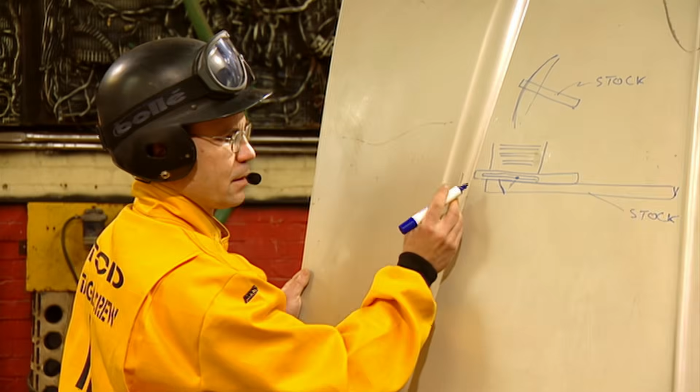Can I just say, I'd be a bit concerned that all this loading mechanism is complex. If that design is 1,500 years old and it still works, and you've had tens of thousands of people working on it for 1.5 millennia, there's something good about it. Nice try, Todd, but it could take another millennia to convince our headstrong young Captain Pup.

Yeah, we need some bits. That's a good plan. Got to be looking at, Steve, something that's got brakes on it, because air capacity is going to be everything to us. We're going to need a basic frame, Dens - seamless tube with about a 14mm bore. Yeah, we need a spring, and get as much as you can, because we don't want the other team getting it before we do. Right, lads, that'll do. Off you go, and good luck. Right, Dodge.

Loaded with their lists, our scavengers shoot straight out into the scrap. It's mayhem on the heap as our 2 teams must find the best bits and bobs to build automatic weapons.

The Big Dippers, Steve and Brian, are sifting through the scrap, looking to pick up a truck to build an awesome air-powered cannon. Dodge, do you copy? It's in a white Ford van. Brian's just having a look at it. I'm just going to have a look over this other side, see if there's anything over there, mate.

Whereas the stage crew are looking east for inspiration and have agreed on a plan to build a mechanised Chinese repeating crossbow. Or maybe not.

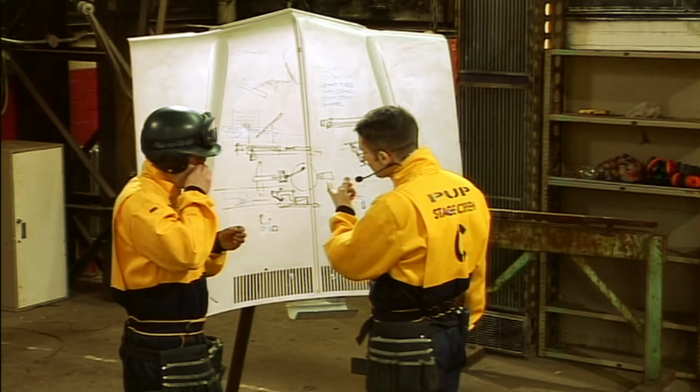Young Captain Pup has decided the existing plans look decidedly dodgy. He's worried about the rate of fire. You're stuck, I'm not convinced it's the best way to do this. It's your team and you've got strong will - if you're not going to be behind it and committed... No, that's not it, what I'm saying. If we make a decision, I will be committed to it. But I'm saying, now we need to make the decision. If you're asking my opinion, I say go this way.

There's a drama going on in the stage crew build area. Todd has one last try to pull Pup round to his way of thinking.

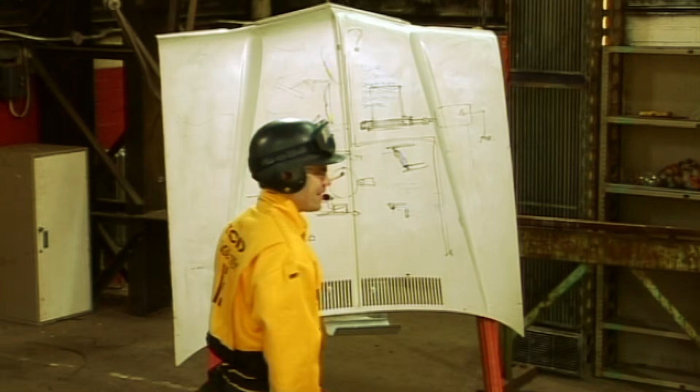Now, have you come across something called a sabot? No. We can get like a length of drain pipe, maybe 14 inches long, pack it full of 5 darts, 10 darts, whatever, and you shoot that.

Stage crew expert Todd has had the ingenious idea of using a sabot to increase their rate of fire. A sabot is a disposable sleeve used to fire funny-shaped objects. It fits around the object and when fired, falls away, allowing the funny-shaped projectile to carry on flying through the air. It's a great way of firing more than one arrow at once, but will the headstrong young pup go for it?

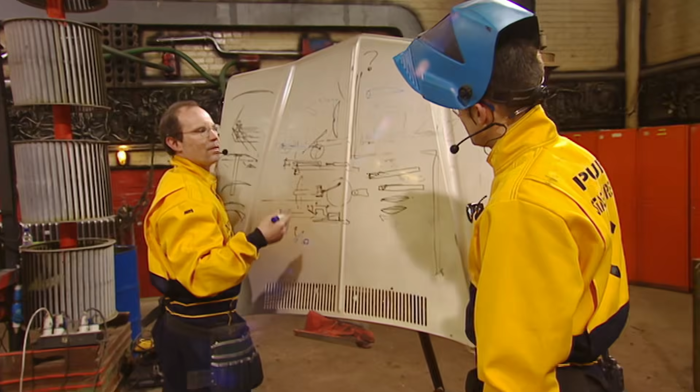Oh, Todd, I like it, mate. I like it. Right, and that would look really cool. I like that.

Stage crew, well, teams don't usually get the gas axe out this early on. Well, it's something we want, so we're going to have it. What are you trying to get at under there? The springs off this lorry. Leaf springs. And what are you going to be using these springs for? It's basically a crossbow principle - a magazine full of arrows that will self-load. Crossbow with a big tight wire. The wire will be pulled tight, arrow will drop in, automatic release. Right, well, I better leave you to it. Excellent, but best of luck and enjoy firing the arrows. See you later. Bye.

Denzel opts for strong-arm tactics on those leaf springs. Oh, that was it, that was nearly it.

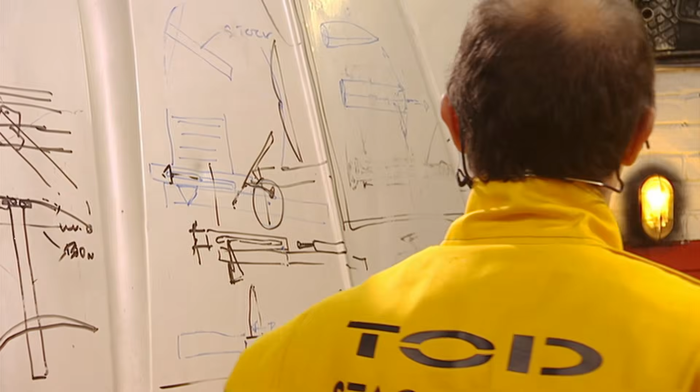So Pup is sold on Todd's genius idea, which means Denzel's scavenging hasn't been a waste of time. Oh my word! Now... or has it?

For a lorry, how many springs like this have you got? Only that one, and then we've got one that's the same length, but it's at least 5 or 6 layers. Okay, because we need the spring to be a matched pair, because we're using 2 springs. All right, I didn't realise it was 2. Ah, right, okay, so we need a matched pair of springs. Yes. Right, okay, that could be a job.

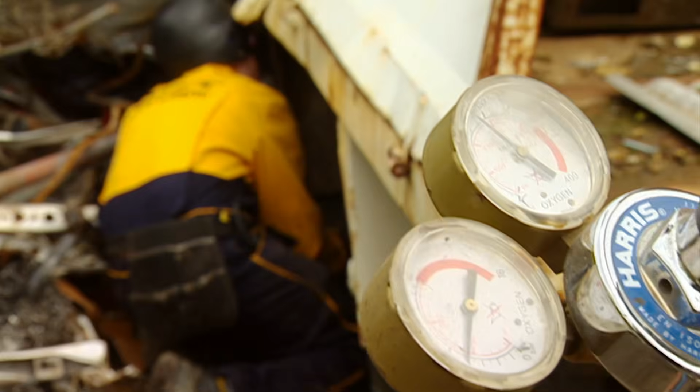Denzel breaks the news to Jet. Oh, so we've got - both sides need to be even matched, so we're looking for one vehicle. So there's really no point getting the other springs out. What a waste of time. But we can't find anything at the moment, got to keep rummaging around cars, I reckon.

It seems there's a lot of them over there. We're lagging behind, I think, aren't we? I don't know. Yes, boys, you are.

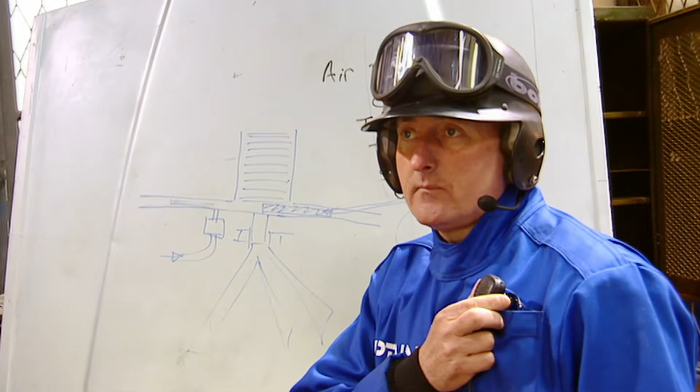Go ahead, Dodge. Dodge, we've found a vehicle. Brian's happy with it, got some air tanks on. The only thing is, it's not starting at the moment.

I'm a bit worried, Brian, we haven't got a home start. But is there something in the truck that you actually want? Yeah, there's a compressor and air tanks and everything you need on here. So could you build the whole thing on the back of this? On the back, that's right. You just run the truck and that pressurises the tank and fires the arrows.

Big trucks are harder to stop than little cars, so they use air brakes, which are very powerful. The air is compressed by the compressor and then stored in a receiver. When the truck brakes, it uses the air to push the brake shoe onto the wheels to bring the truck to a standstill. So if the Dippers can get this truck turning over, they can use its brakes to get the gas for their air-powered cannon. Trouble is, if they can't get the engine started, the air brakes won't work, and they won't get very far.

I mean, it looks in fairly good nick. Yeah, I think it's done a few miles. I think it'll go.

The boys from Blackpool have everything they need to build their air cannon on this broken-down truck, but they'll have to get it back to the build bay.

But the stage crew are really having trouble getting started. Denzel, hang on, mind power. And their communications have now broken down. My team seem to be... their radios are on. In fact, you should give them a talking to next time they come on, because they've got to answer. Hello, so we're never going to get Denzel anywhere. Denzel! Denzel, is someone shouting at us? No, I don't think so.

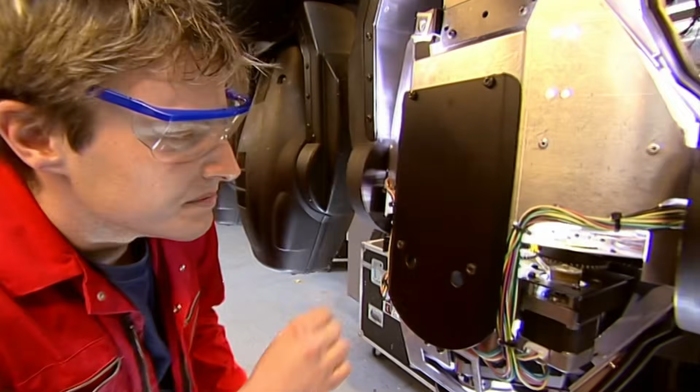Then there's the supporting cast, engine-obsessive Jet. I love jet engines, they're great. Jet engines rock. No one should ever use anything else apart from jet engines for everything.

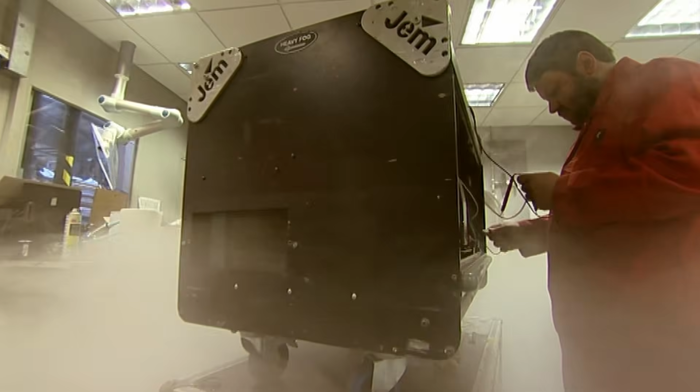And lastly, an extra any cast would want is Denzel, who found his fabricating skills on the farm. He's very much not your bog standard graduate design engineer student, he's seen it from the real life side of things. So what's the stage crew's motto if things aren't going their way? The show must go on!

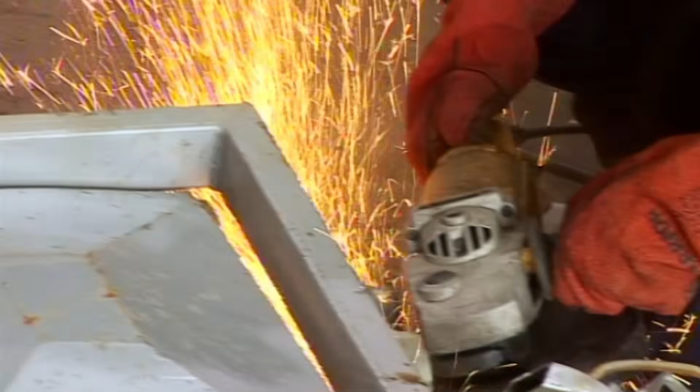Dance, can you find any straight bits? With communication restored, the stage crew are putting in a rousing performance on their repeating crossbow. Pup builds the stand, the lock and stock is sorted. So, engine, gearbox here. Yeah. Cue Denzel with two smoking leaf springs. Okay, good. Now in a perfect world, you would have got the ones without holes in the middle. But in a perfect world, shall I just shut up? Yeah, absolutely.

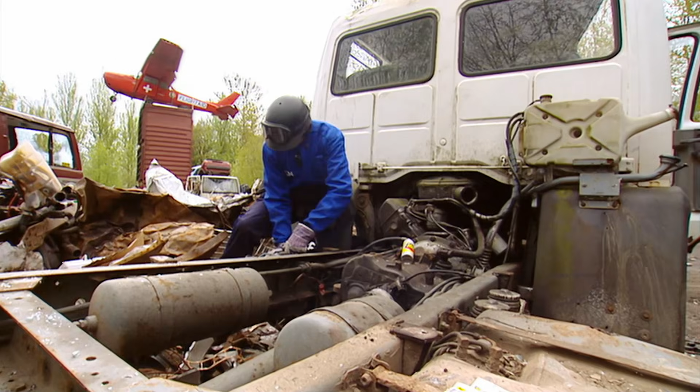The Big Dippers are still working on that broken-down truck. It's got all the gear they need on it to build their air cannon. Expert electrician Steve is having a rough ride trying to get it jump-started. Where's the big truck, Stephen? We're going to try and get it started now, Dodge, and we're bringing it in. They need the pressurised air system from the brakes. It's not going to go.

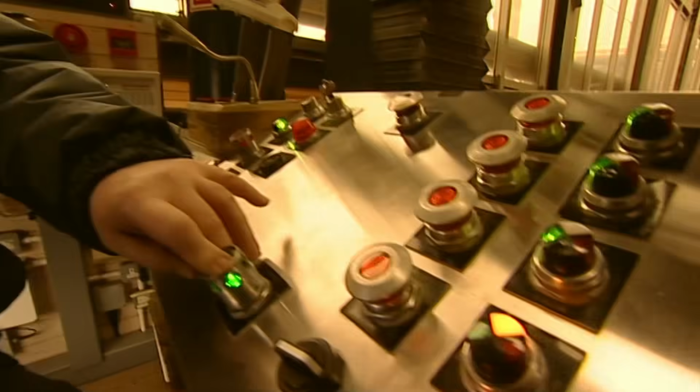He might be feeling the pressure, but his team know all about thrills and spills. The Big Dippers, a team of roller coaster repairmen from Blackpool. Off they go! When Captain Dodge isn't enjoying the wind in his hair on the big one, he's managing these theme park techies.

It hasn't always been an easy ride. Dodge has had to earn the respect of his team.

Yeah, should be no problem with Dodge for the first 10 minutes. We'll just end up building it for him, really, and we're just taking the credit, I think. No, it'll be a team effort, Brian.

Team effort. While scavenger Steve does see the amusement in fairgrounds, he's not happy with heights. Steve's not safe, really, off anything over 4 foot, is he? 2 pair of socks and that's it for Steve.

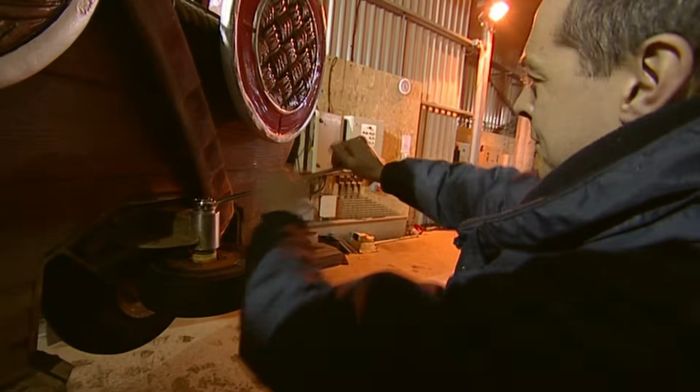And they have a secret weapon under their kiss-me-quick hats with loudmouth Brian. One of the secret weapons on our team is Brian. This man can build anything. We'll rely on you, Brian, because you can make something out of nothing. You are that good.

Anyway, we are the Big Dippers, and we're going to win. Well, they won't be unless they can get their truck started.

Brian, do you want to drive it? He may not be confident on the roller coasters, but Steve certainly knows his way round an engine. Nice and straight. Right, take her in. Go, Brian.

Very positive, or utterly presumptuous? Time will tell.

This week's judge is Master of Archery Steve Ralphs. From Orlando Bloom as Legolas to Keira Knightley as Guinevere, he's the man who teaches the stars how to shoot. Nice to see you. Yeah, welcome to the heap.

Thank you very much. Now, it seems they've finally decided on their design, as far as I can see. We've got the Big Dippers with their compressed air cannon type design, and the stage crew with their traditional crossbow. It works along the lines of the Chinese repeating crossbow, which is a manually operated machine. The stage crew are going to use a mechanical means to replicate that design, and of course the Big Dippers are making basically what's a gun. It is essentially a gun, isn't it? Yeah, conceptually, which one is more likely to actually fire something?

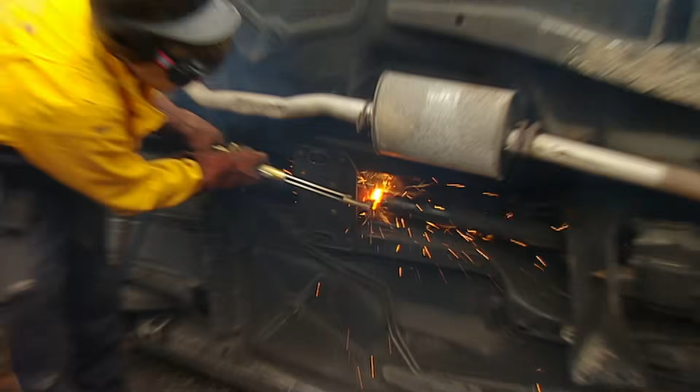Yes, we need to get rid of this exhaust, don't we? Jet is firing up his engines as he gets gas axing. Pup's putting on the leaf springs for the bow. Things are really hotting up for the backstage boffins.

Maybe a little too hot. Jet's gas axing has set fire to the car's upholstery. Sorry.

Just took a face full of whatever. I reckon we're out, mate.

With a flagrant disregard for his own safety, Denzel continues to try and get off that reduction gearbox. Can you get any more lift on it for me?

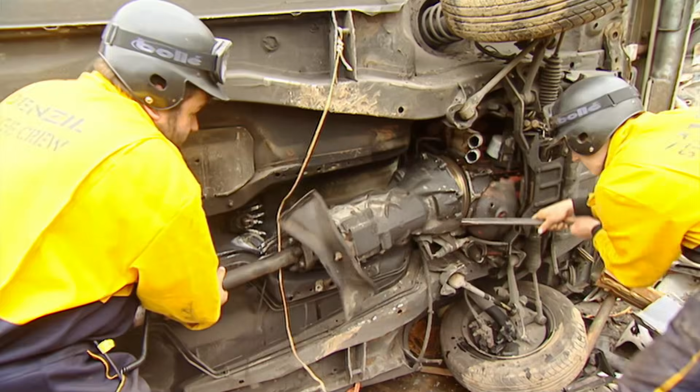Lift - it's essential, as it'll be the speed regulator for their repeating crossbow firing mechanism. That'll do. Do you want to put it straight in the trailer with me? Yeah. While Jet and Denzil are collapsing a car,

Captain Dodge decides to take down that truck. 1, 2. Not happy with just destroying the front end, Dodgy cuts that lorry down to size.

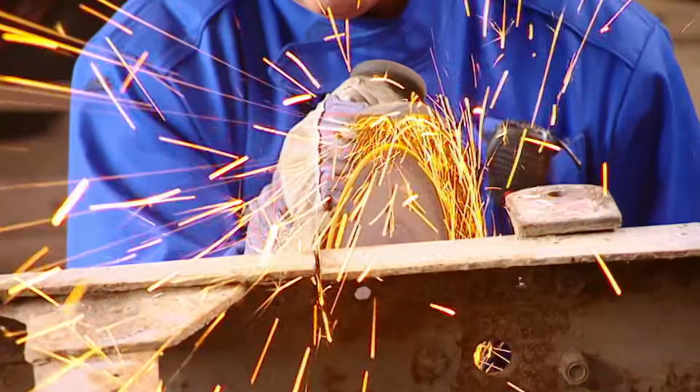This is the main find, though. This is good, and it works. Hey, perfect. Did a bit of fabrication - cut the roof off. Made it into a cabriolet.

But I know it's effectively an air cannon, isn't it? That's right, yeah, we're using the air system off the actual truck, going through the receivers. Do you know how many blasts you'll get from it? No, we're going to try later on, a bit of trial and error.

Well, I mean, I think by the looks of things, you've still got a fair amount to do, haven't you, Steve? Yeah, looks like Dodgy's going to have a word in a minute, so I best get back into action. All right.

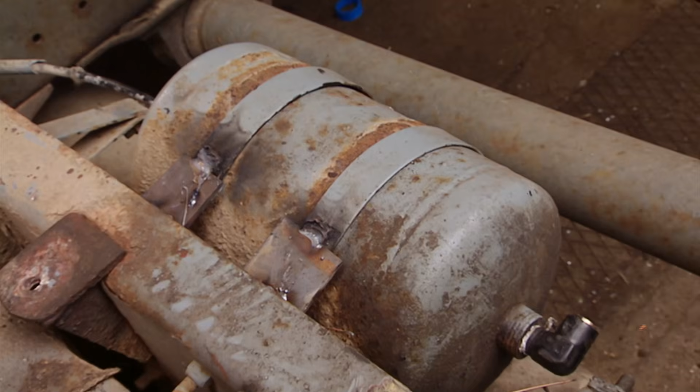Captain Dodge drags in the floor plate and dishes out the orders to his roller coaster repairers. This plate is ready to go on here. Stitch, stitch, stitch, from here to there, from here to there, one at the back. I'm going to mount that tank on here, however. But expert John thinks there may be a problem.

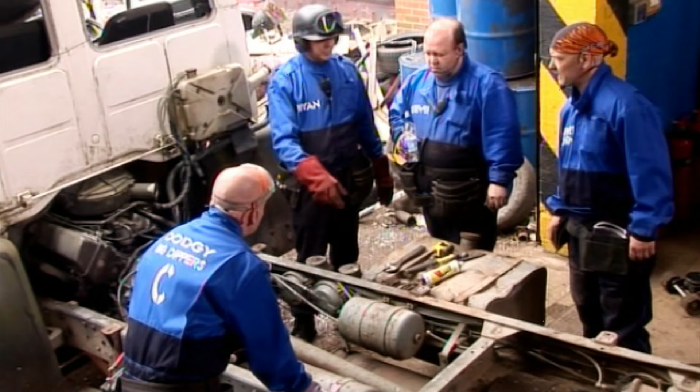I think we won't have enough air in these. He thinks the truck's brakes might not hold enough air. I think what we should do at this point is find more receivers. Yeah, because you've only pressed the brakes a few times and they're gone. I know, yeah, we do. So it's back out onto the heap for Steve and Brian, looking for some air tanks.

Meanwhile, Todd and Pup are tanking through their build. They finally seem to be seeing eye to eye. It's starting to take some sort of shape now, which is always a bit of a boost to morale.

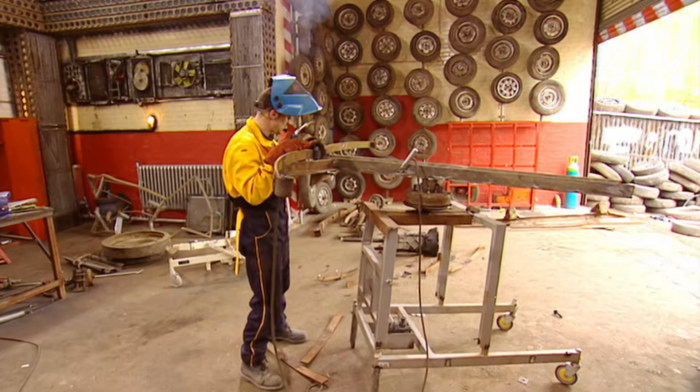This looks absolutely fantastic, Steve. This is the Chinese repeating crossbow, and what the stage crew are building is the descendant of this. This is its ancestor, the manual version, whereas their machine works automatically. It addresses the age-old problem a crossbow has with its rate of fire. You load into this, the string is captive, there's a small peg, and it has a mechanical repeating motion.

So does that mean I can actually have a go and shoot some darts? So you're going to pull rank on me? Well, I think yes, simply I am. Fine, so tell me what to do then. You don't put it up by your shoulder, you have it held down here, and you cycle, move this hand back, and by cycling this forwards, engage. So you just pull it back? Yes, as fast as you can cycle the action.

That is fantastic, wow, I'm getting sparks. So you see, what the stage crew are doing is they're using this device, but they're going to make it work automatically, using the machine rather than an operator.

There's a lot less than 10 hours left as Super Scavenger Denzil picks out bolts to keep that bowstring tight. Dropped one, mustn't do that. They're like gold dust, been rummaging all day for these. Here boys, if you didn't have a beard I'd snog you. Oh no, thank God I got a beard.

Actually, I think that's going to get us out of a mess. Yeah, that's nice.

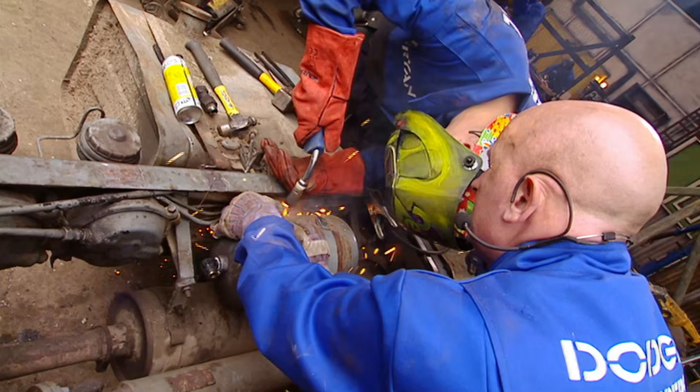Right, what? Just gone through an air pipe. Brian may well look sheepish, he's just tried to weld a rubber pipe. Yeah, well, if you did, you could hear the air coming out. It was just doing it.

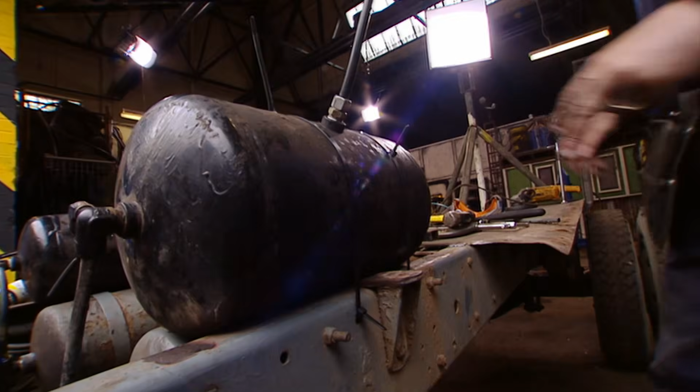Teams, your attention please. You are halfway through the build. You have 5 hours remaining. 5 hours remaining, teams, thank you.

Better pull your finger out, you dodge. John, we need to be doing a bit. If their air cannon isn't airtight, they may as well take a train back to Blackpool. This really is a roller coaster of a day for the fairground fixers.

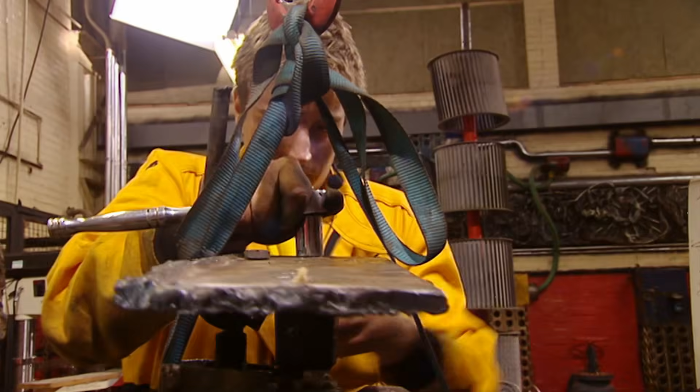Will the stage crew get their crossbow repeating? It was your idea, no, it's your idea to do centre one. And will the Big Dippers get back on track? That makes sense, yeah.

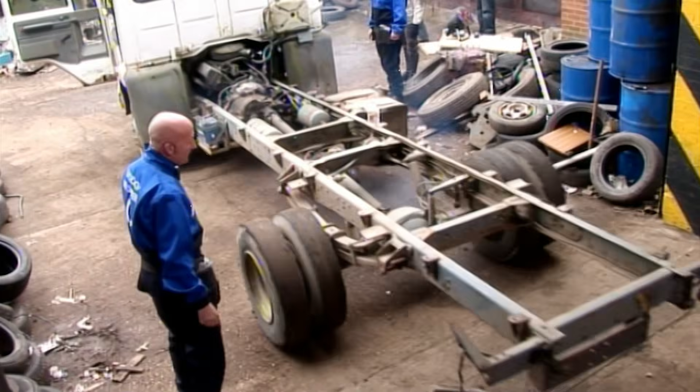Welcome back to Scrapheap Challenge, where our two teams are building automatic archery machines. The stage crew, a team of theatre technicians, are looking hot under the collar forging their repeating crossbow. I think that's going to get us out of a mess. Yeah. The Big Dippers, roller coaster repairmen from Blackpool, have nearly all the bits they need to build an awesome air cannon.

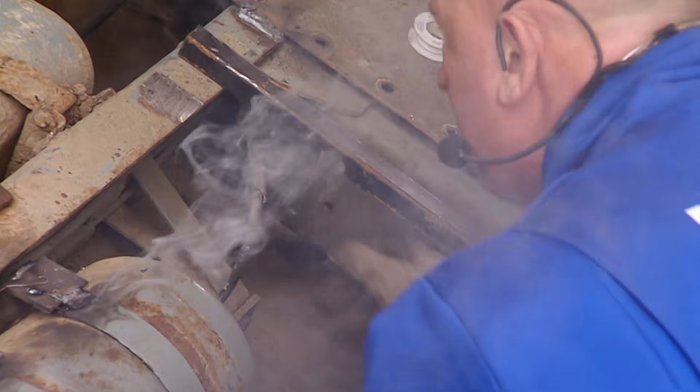But they've cut through an essential air hose. Right, what? Just gone through an air pipe. It has done? Yeah, under here. Yeah, there's a set of pipes, and we must have just gone through them.

Brian may be looking guilty, but thankfully expert John is there to get him out of a spot of bother. Well, at the end of the day it doesn't matter, all we have to do is swap one of the front brake pipes onto the compressor and run that into the distribution valve, because it doesn't matter about the brake pipes. His quick thinking has got them out of a serious bit of scavenging, and they can get back to building.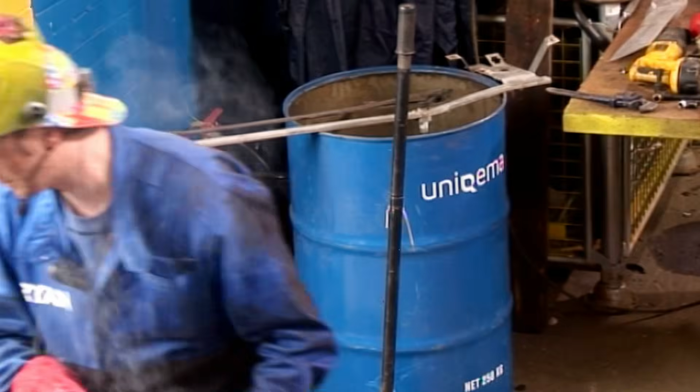Where are you going to put that one, Bri? I am not bothered. Well, we've got these, we had a... There you go. How's that?

So we're vaguely halfway through-ish now. Have you changed your mind at all on favourite design? No, my design, I love what the Big Dippers are doing, it's just the most fantastic design. The crossbow, the repeating Chinese crossbow design is an old favourite of mine. I'd like to see it work with an automatic system rather than a manual system.

But it's so ambitious, what the Big Dippers are doing, that if they can pull it off it will be very impressive. I have no idea the kind of pressures that air brakes produce, but I've got a feeling it's quite high. It's very high, channeling it down one tube to fire one dart out.

John, the expert, is saying we're going to have to recharge, so we might get 3 shots off. So if the challenge comes down to a time, then they might miss out. They might be more accurate, but they might miss out on time.

So, Steve, is your money still on the Big Dippers at this stage? I think they'll take it to the last minute, but if they get it, yeah, my money's on the Big Dippers.

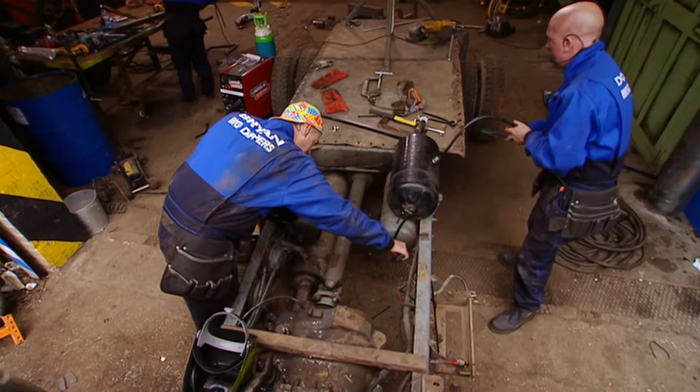The receivers go on and look okay for now. I'm sure tomorrow it'll all come good.

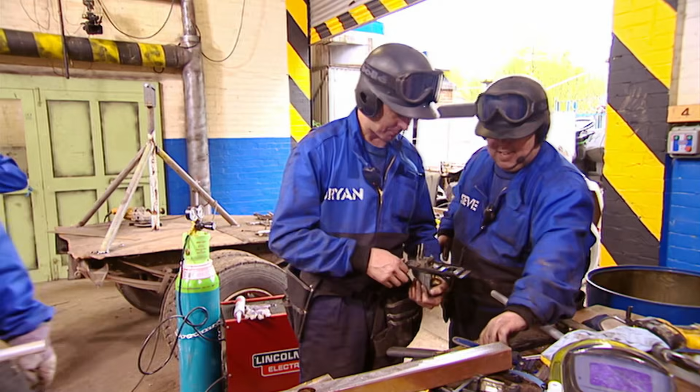What size are the ports in it? Oh, that's perfect. Is that all the movement it takes? That's magic, mate. Not that, we'll use that. We're using this? Yeah, right, let's get that off. Get the pipes and then...

That on-off valve should be perfect for releasing bursts of air to fire their arrows.

So are you having as much fun as you hoped you would be having? Oh yeah, definitely.

One team that is definitely having fun is the stage crew. Jet's attaching a gearbox from an old family car.

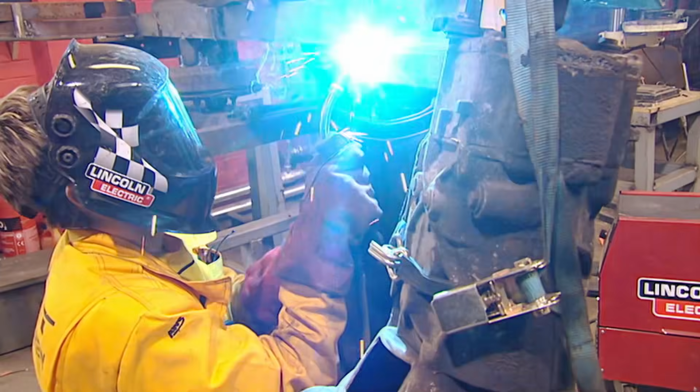Fabricated your own box section there, Stewie? Yeah. It's stuck, mate, that's all that matters. It'll be able to adjust the speed of the cam rod that will push the trigger up to catch the bowstring.

And the bow is getting strung. Nearly there, nearly there, nearly there. Look at that. More than halfway through, and the stage crew are putting in a rousing performance.

Yeah, that's a little happier, isn't it? Todd and Pup may have made up, but that scrap-repeating crossbow is looking anything but friendly.

Need to pop that up a little bit so there's more or less parallelisation, new word. You mean you want that with a bit of heat and smashed up? Yeah, very good.

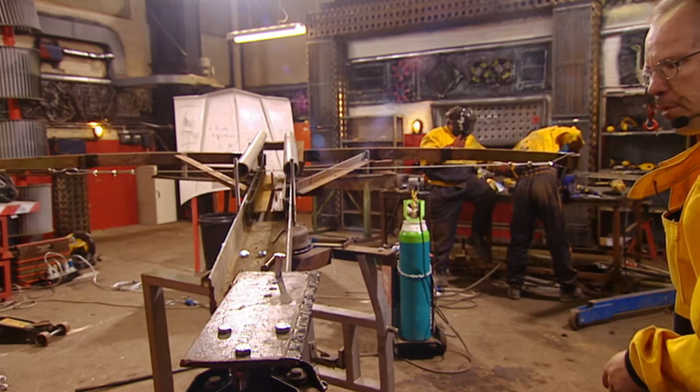Okay, fab. But not all is well with the stage crew, as Pup's trigger design is looking decidedly dodgy. Yeah, that's actually quite a fundamental problem, isn't it?

Oh, it was your idea. No, it's your idea to do the centre one. See, actually, my edge one wouldn't have this problem, would it? If we'd done it the way I wanted to do it in the first place, we wouldn't have this problem. Right, anyway, but we've still got the problem. We still got the problem.

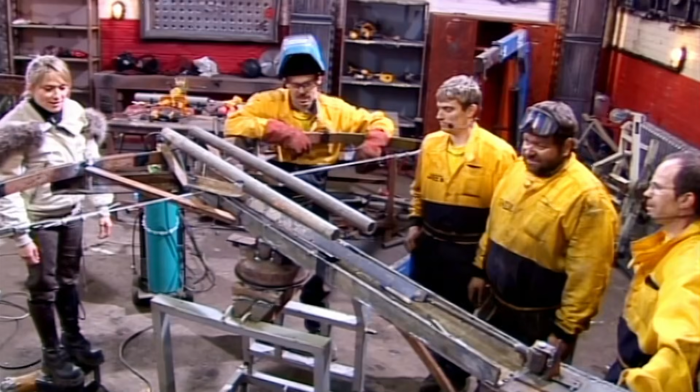How are you all doing? This looks great, are you pleased with it? Yeah, pleased. Todd, you're an old Scrapheap hand, how are you feeling about the work as it stands at the moment? I think it's all great.

Definitely the problem is the trigger. Todd was running through all sorts of different ways of doing it, the four main tried and trusted ways that go back 1,500 years. And we're using something completely different, which is partly my responsibility, so I do feel a bit responsible. But I feel confident we can do it. Okay. Todd? The reason that it hasn't been done before is because it doesn't work very well.

Originally, the stage crew planned to use a tried and tested Chinese repeating crossbow mechanism, but Captain Pup didn't like the look of it and has come up with his own design. He's designed a motor-driven cam that, when pushed forward, catches onto the string. When it's pulled back, the trigger is tilted by a notch that releases the string. Nice idea, but as it's never been used before, there is no guarantee it'll work.

There's still quite a lot to do though, isn't there? Oh, masses. You're going to get it all done? Yeah, I hope so. Todd? Yeah, it's just fine, it's just fun. Spoken like a true Scrapheap old hand. Let's get a wriggle on!

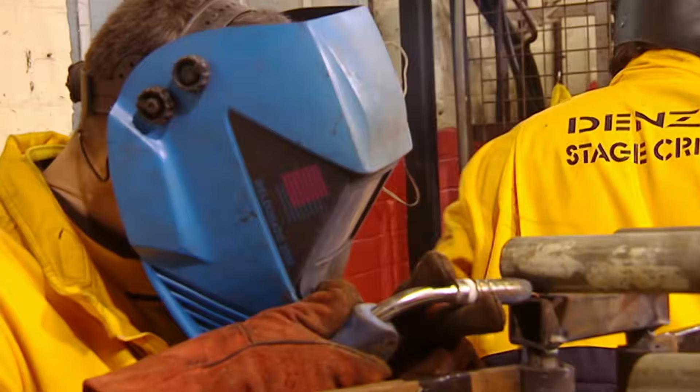The stage crew are looking like a well-drilled team. Denzel is putting on the rod, which will attach the motor to the trigger. We know where the string is now. Got a nice hole there through the trigger block. Might have to do a little bit more to it, it's a little bit marginal. So cut it to that point.

While top bodgers, the stage crew are putting on a show. If in doubt, hit it hard.

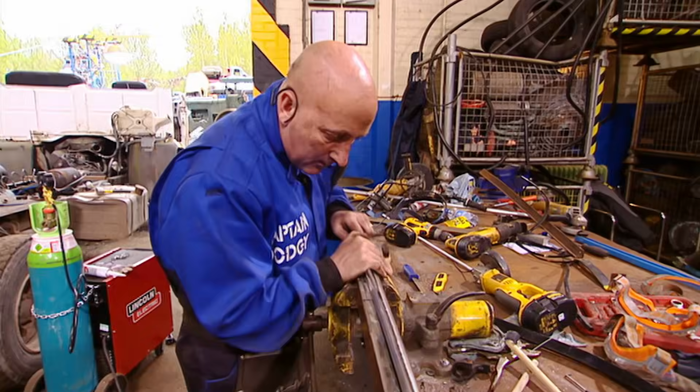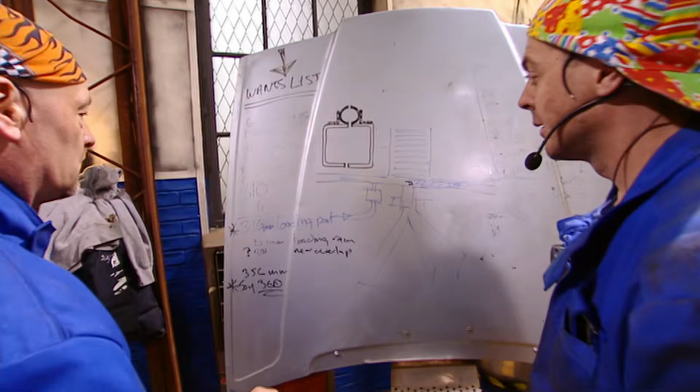Things are a little sleepier in the Big Dipper's corner as Brian gets a lesson in gun geometry. So, the crank. Now, I said 356 before. 316. Then we want a bit behind that for the rod. I would suggest another 25. So that means, so it's a 366, so 150, 170, 171.5.

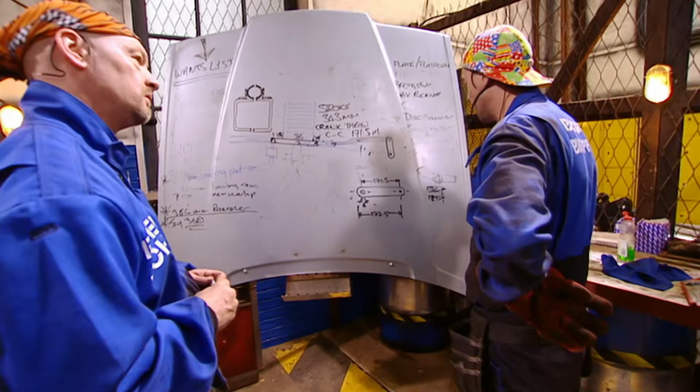Does that make sense? Sounds complicated to me. Anyway, how does it load the arrows, John? That's what's going to happen. It's going to make some good old noises. Ah, now we get it. Right.

Welcome to this week's Scrap Lab. This week we're going to make an air-powered sock shooter. Like the Big Dipper's air cannon, we'll be using air pressure. But instead of shooting arrows, we'll be launching laundry.

First, we need something to create pressurized air. We'll be using bellows, and on the end of the bellows we've put on a barrel. Pop the sock into the barrel and make sure it's a snug fit. Then, when I jump onto the bellows, all the air has to leave. Because the socks are snug in the barrel, air builds up behind them. When the air pressure gets too high, the socks are flung out of the barrel. And that's how we can launch laundry by using air pressure.

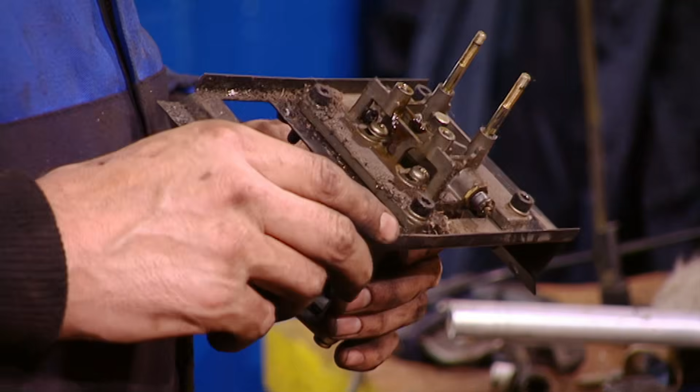The Big Dippers plan to up their air pressure by using a valve to block the barrel. Well, they would be if they could get it to work. No, we can't use this, unless we can think of a way of making it so it's pressed until we want it to fire. It's bad news from expert John. This could be a really big dip for the Dippers.

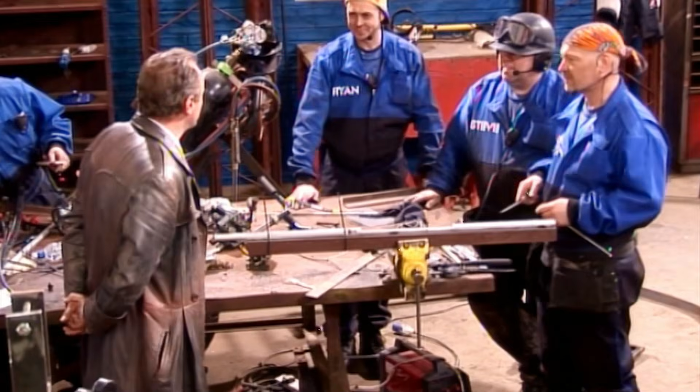Doesn't look like a gun, chaps. Evening. I've just heard a slight rumour that there's been a vague change of plan. There's been a massive change of plan, I beg your pardon. Oh really? And why is that? I mean, this still looks quite sort of air cannon-like. It is. The problem has been that we were trying to have a nice controlled system where the air would be triggered to fire the arrow at the precise moment, so we didn't waste air. It hasn't happened, we haven't been able to find the right valve. The valves are too big, it means they have a lot of air in them, air that should be propelling the arrows. So we've now decided to eliminate the valve altogether, so we'll now have a constant supply of air.

Because the Big Dippers can't find a valve to release the air to fire their arrows, they've taken the radical action of not bothering to put one on at all. This means there'll be a constant supply of high-pressure air into which their motorised pusher will feed their arrows. All very well, but with all that air hissing out everywhere, if they're not quick to find the targets, they could soon be out of breath.

You know, you said we're going to have a constant air supply to it. Yep, it's going to use twice as much air. No, it'll use a lot more than that. At least - no, it'll use like 10, 20 times as much, because it's just... Yeah.

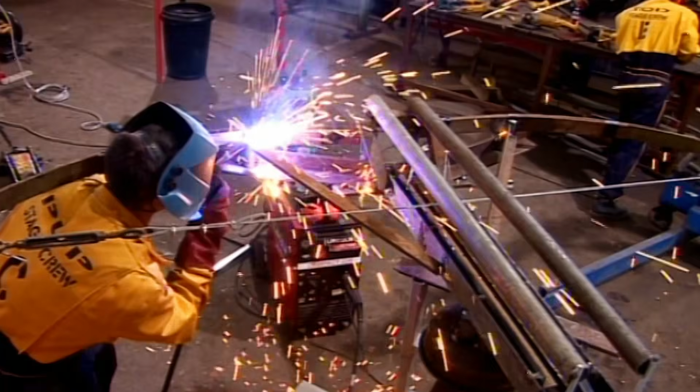So, Steve, to have both teams at this fairly late stage in the game not really getting close to finishing and having huge amounts of problems is slightly worrying, isn't it, really? Well, the stage crew seem to have it all under control in as much as they got everything bolted on, and the Big Dippers, nothing still. They've had problems with the air, they've had problems with the valve, they've had problems with the hose connections. They're really going to take it to the wire time-wise. If they can get it to work, the accuracy of the Big Dippers machine will pay off. It's just getting the time now. Their backs are against the wall. They may be doing a little bit of tinker time work tomorrow, just a wee bit, just sort of polishing their barrel.

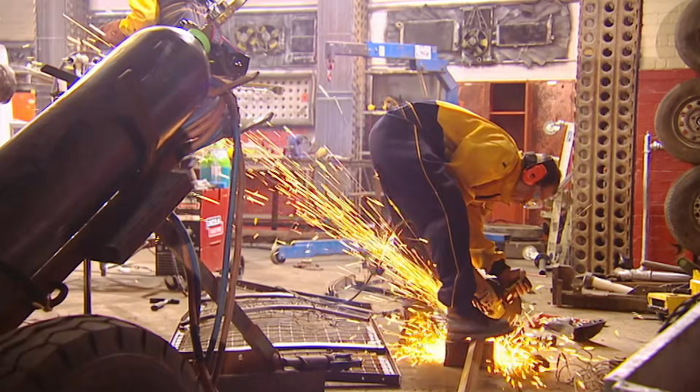The cartridge goes on to hold a stack of sabots that will drop down in front of the bowstring. So about here, I reckon, about there.

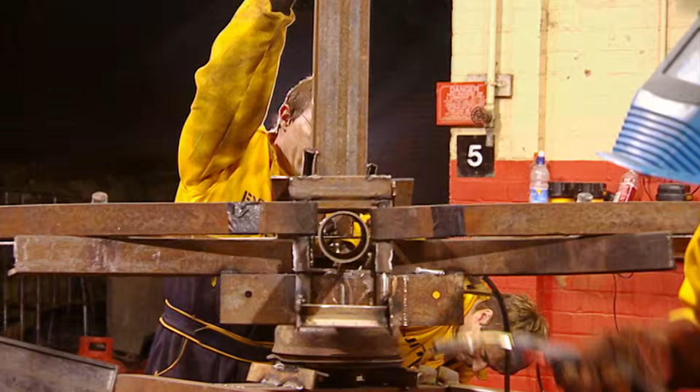We need to start making our sabots because we're a little bit short of those and we need to make them. Is that the cutting in half of the tube? Yes, Denzel's underway with the sabots, the disposable sleeves that will hold a volley of arrows. If they don't get them sorted, there won't be any arrows in the air.

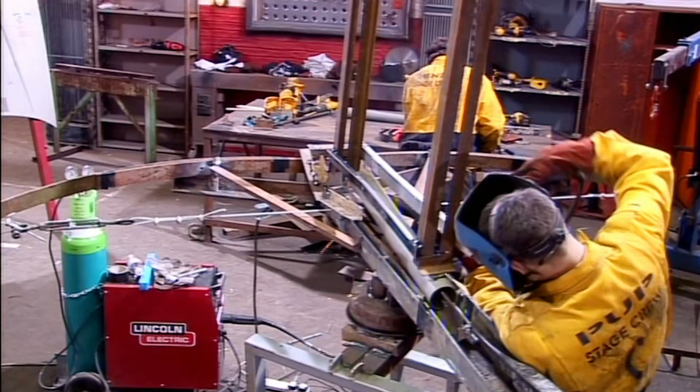Jet fits the starter motor.

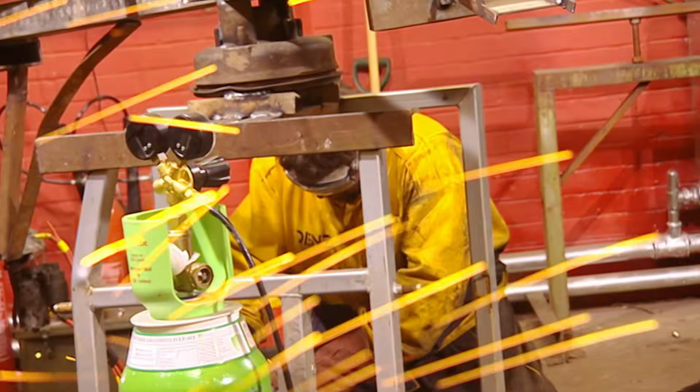Even perfectionist Pup is bodging away. One little mistake costs 5 minutes in these crucial moments. Are you finished welding though? Yeah.

What's going on with the starter motor position? Is that under control? Yeah, we've just made an M12 bolt out of a piece of stud and a nut, welded it on. Oh, it was just sloppy 10 mil in a hole, was it? I think so.

With all the bits in place, that trigger mechanism looks ready for testing. They have to get it right or their bow simply won't fire. Whoa! It does have a tendency to lock in, it locks at the end a bit. That just needs extending.

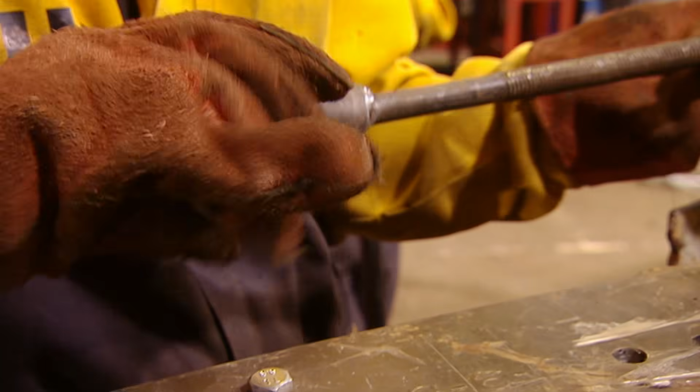If this thing really works, even if it just shoots, let alone if it's automated - if it just shoots, it'll be brilliant.

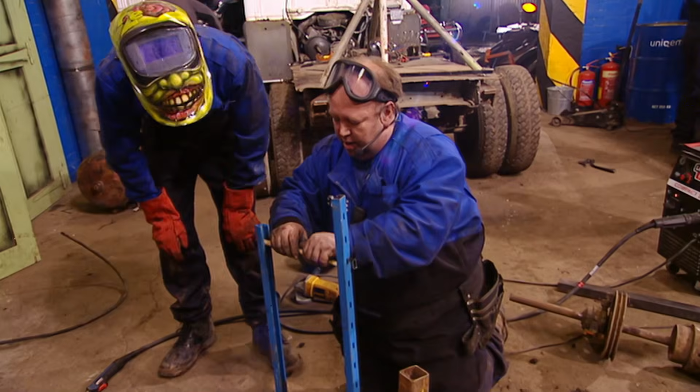The Pleasure Beach Bodgers are also up against it with their air cannon. Steve cobbles together the cartridge. The ammo will be gravity-fed into the path of the pusher, which will pop it up to the pressurised air. If it jams, they'll be in a sticky scenario.

Well, it's solid, that, mate. Brian, it's OK, that. It's not going anywhere. All right, that's all right. John just said put one on the back. If that's... yeah, it's solid, that. Not going anywhere. What about that height?

Is that enough to get 50 in, or are you going to have to extend it? No, you want to put a diagonal on that in case it gets a clout sometime - it's just if it gets a clout, it'll go out a square. All right.

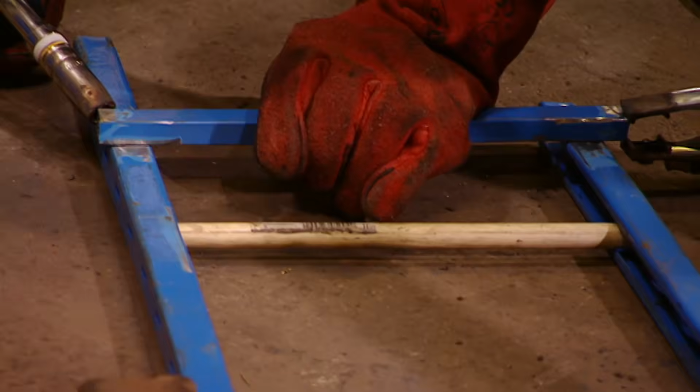Can that go on though? Let me just make sure this runs first.

With them all on, and like you said before, we might even have to put a bit of weight. Yes, we could. Is it all right? Can we have that on? Yes, we can weld that on.

Teams, you have 1 hour remaining. 60 minutes build time remaining, teams. 1 hour, that's all, thank you.

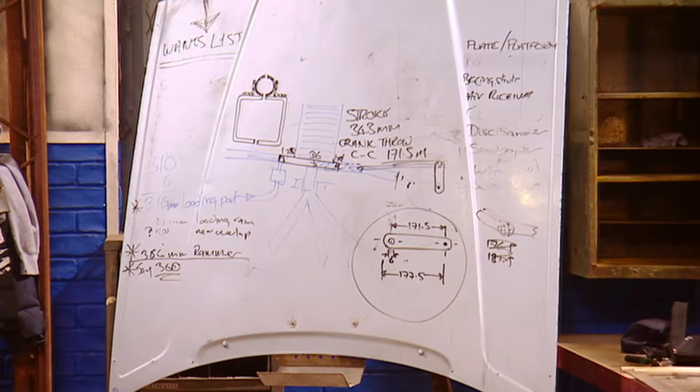I think there was a definite battle of wills between Pup the captain and Todd the expert. But it looked great - they looked like a kind of crossbow-y type thing. It does look really good, doesn't it? How are they going to pull it back. They're both having the full-on frantic scrap experience. Yeah, when they finish - sweating lots, shaking a bit and twitching, and very, very dirty. In fact, Denzel, he's a bit like a kind of darker version of the Honey Monster, really. He is, isn't he? Yeah.

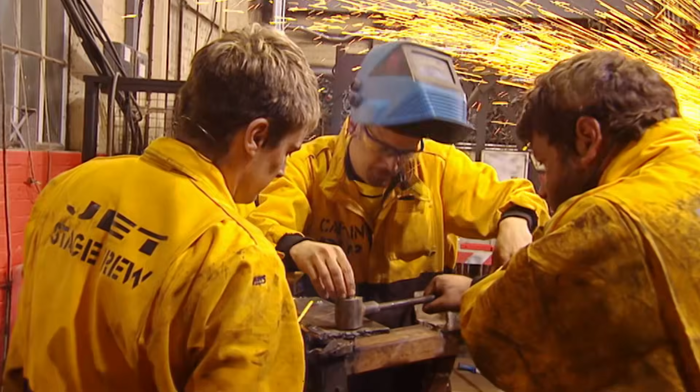What I'm going to do is just cut the bars. It goes that way.

I think we want to think about having a little tester here. You're kind of committed then. The problem is you're committed. What we don't want to do is rip this apart.

That is amazing, they've actually finished, and they're going to do a test fire any minute. In fact, I'm going to get out of the way.

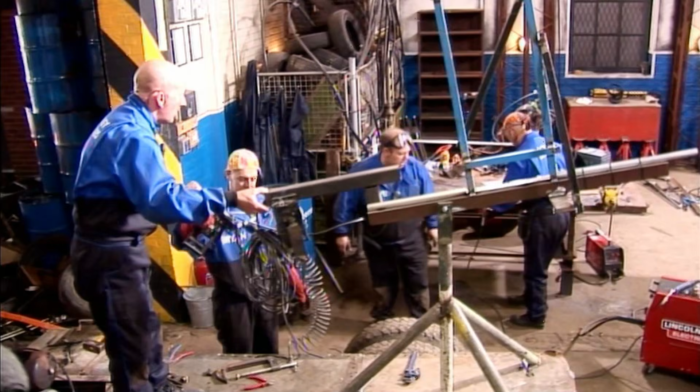With the stage crew ambitiously about to test their trigger, the Big Dippers are dangerously close to finishing. Don't shoot anybody, will you? We'll try not to.

To the left, to the right.

In the nick of time, with seconds to spare, both our scrappy shooters are looking ready to take their aim. Who's going to be doing the shooting on this? Who's not going to be doing the shooting on this?

OK, teams, your 10 hours has expired, and it's time to set your sights on tomorrow's targets. Get ready to lock and load your pointy projectile firers. Well done, teams. Great build.

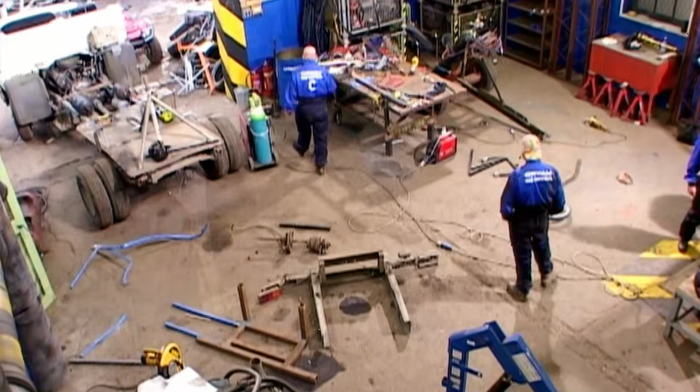It's been a roller coaster of a day for the roller coaster repairman, and the backstage boffins' encore didn't quite go as planned. Will the Big Dipper's air cannon be a fairground attraction? Or will the stage crew's ramshackle repeating crossbow hit the bullseye?

The two teams are given the traditional tinkering hour to ready their contraptions for competition. There'll be 2 tests. First, testing for accuracy, and then the long-distance golden shot.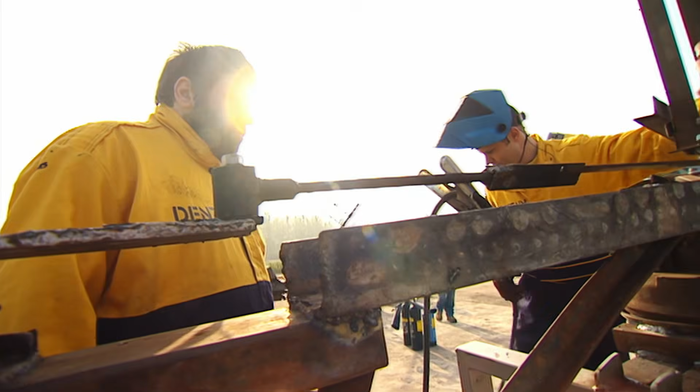While the roller coaster repairmen give their truck a paint job, it's a titanic tinker for the theatre techies, as the night before they broke their crossbow. We're getting there, boys, that's twisted on there. Let's hope that hour is enough.

Round 1, and accuracy is the name of the game. Each of those concentric circles is worth more points the closer to the bullseye they get. Well, now we're here. Now I'm really looking forward to seeing some actual bolts flying through the air.

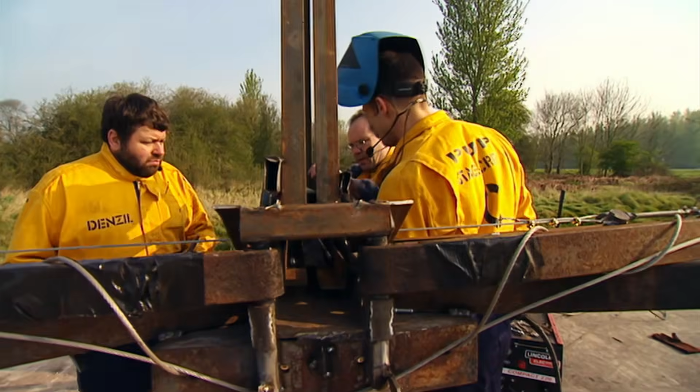The stage crew have built this enormous leave-me-alone crossbow. It's making a statement just by sitting there. Yeah, it's going to be an interesting challenge.

First up, it's Blackpool's finest, the Big Dippers. Expert John loads up the air-powered cannon, Steve and Bri power up the compressor, and Captain Dodgy is the marksman. Big Dippers, prepare to unleash your bolts from the blue! OK, go. Air on, electrics on.

Oh, yeah! Wow! Oh, way over the target. Oh, yes! It's a flying start.

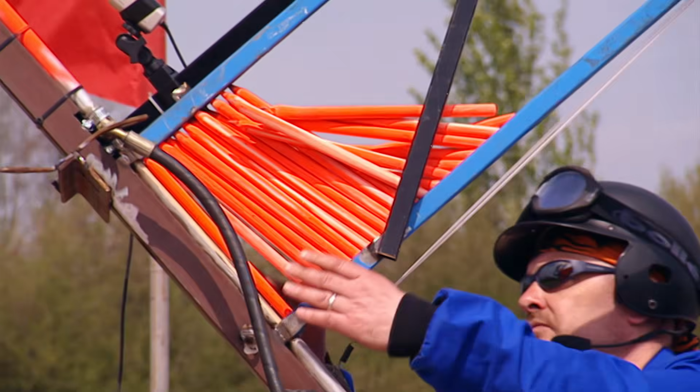But there's another problem for the Big Dippers. Now they're jammed, now they've got a jam. This could be costly for the Pleasure Beach boys. They're now removing some of the bolts because there's too much weight, I think, pulling them down. Now get at the back and be ready to fire.

So there's a quick fix. Doing this. Go, go, go, go. Oh, that's incredible.

Robert to Lisa, what's it looking like from the forward position? Well, Rob, it's looking like it's worked. There's a few arrows that have gone over the top and quite a few have fallen short, but certainly there's enough that have gone in the target. They're going to get a very decent score at the end of this. It's looking a bit like an orange hedgehog from where we're sitting. It's a phenomenal amount of bolts they've hit in there.

Nice one, mate, well done. Good shooting, excellent. Wow, it looks even better from here than it did from over there. But it was going one after the other, bang, bang, bang, bang. It looked awesome from back there.

I think we can get a bit of distance on it if we build that air pressure up. Yeah, we let the air pressure go. We can lob them probably 50% further, I think.

Lisa to Robert, do you read me, over? Read you loud and clearly. Now what is the score? Have you managed to count up all those bolts? They've got a grand total in the first round of 61 points, which I think for the Big Dippers is brilliant. That's a stunning start for the fairground fixers.

The stage crew load up their sabots. Remember, each of those drain pipes is loaded with arrows. Let's hope that ramshackle repeating crossbow will stand up to the strain.

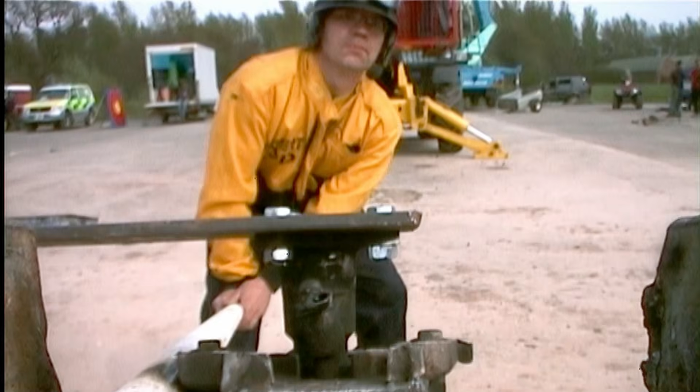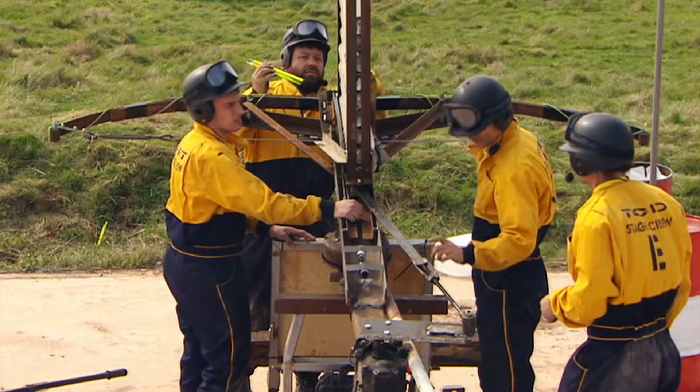Stop. Pup's patented trigger just won't let go of the bowstring. It's not letting go, is it? Oh, they're wasting all their ammunition, aren't they? They've got to sort it out.

Time, and time's running as well. Okay.

But it's working again. Oh no! Oh, the last sabot was a beauty! All over! Happy result, guys.

Who thought of that trigger anyway? You did. Lisa to Robert, I reckon the stage crew had a pretty good round there.

What do you think? I was very impressed, even though the battlefield is littered with spent sabots. I'm very impressed, they got a hell of a lot of arrows in the target. They did, and they managed to score an impressive 39 points.

Very good, that's really good, isn't it? Well, not quite as good as the Big Dippers, but they are well and truly still in the mix.

Round 2, and it's the golden shot round. That target is over 30 metres away. Only arrows that hit that tiny golden spot will count, but they'll be worth a massive 25 points for every hit. First up, the Big Dippers.

Hopefully their loading mechanism won't jam this time. Big Dippers, it's been a roller coaster ride. Fire on the sound of the horn.

Yes! Yes! Bullseye, right in the middle. Straight away, the Big Dippers are peppering the target, but not many are going in the gold.

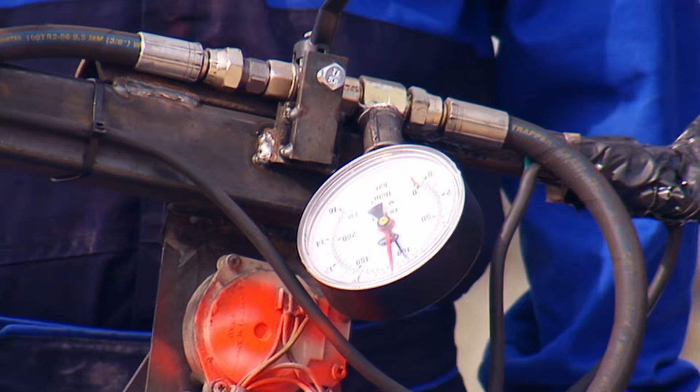And they're off again. Kill it. So that's 2 on target.

Hardly a resounding victory. Stage crew, the last round, confident?

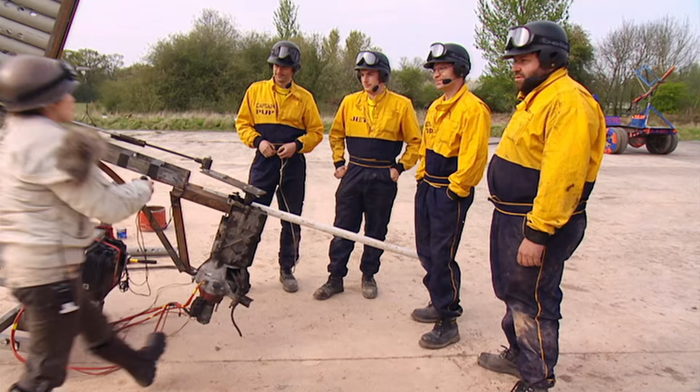We've modified. What do you think it was? The pup trigger was being a little- I thought you were going to say the pup trigger. It was being temperamental, but we've rectified a few bits and pieces, a few crucial components, so we feel a bit more confident.

What about the rest of the team? Do you feel as confident as Pup now does? Yeah, a lot better than it was last time. See what happens. Todd? I'm just hopeful. Let's hope they do all right this time.

Come on, stage crew. Gentlemen of the stage crew, this is your final call. Fire your bow on the sound of the horn.

Short. Jack up, it wasn't short by much. Shoot. Okay, lift up.

I'm a bit worried, it looks like something might be jammed. I can see Denzil in there with a crowbar. The last round it was quite funny, but this round... Shoot.

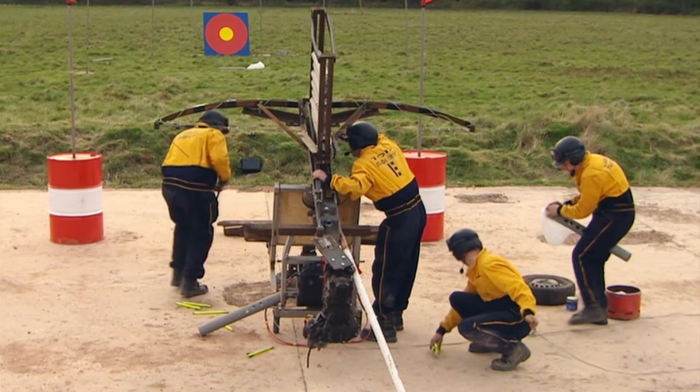Bit more dressing on that trigger. Coming out when that one's ready. Denzil, pop it out, pop out the string, Denzil. Oh, right, spare, so. Got him. You may be just taking the weight slightly as well. That's fine. Shoot.

Come on! Short. Long. Right, is it long? Down a little bit. They just can't get the distance right. Short.

So close, but remember, only arrows in the gold spot count. Take the tiniest smidge off it. Tiniest smidge, hold it tight. They're all just a bit too high for the gold, but at least they know they can reach it. Come on! Clear.

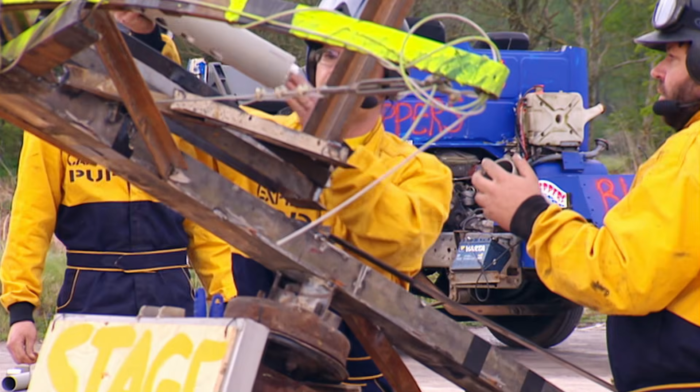Lisa to Robert, isn't this just absolutely infuriating, over? It's amazing because they can hit the target, they can reach it. In theory, all it needs is one sabot to hit the target, and all the arrows will get into the gold spot. They've got perfect distance and aim, and they've got just one sabot loaded with 5 arrows left.

Surely they can win with this shot. Oh, that's a real shame as the final curtain comes down for the backstage boffins.

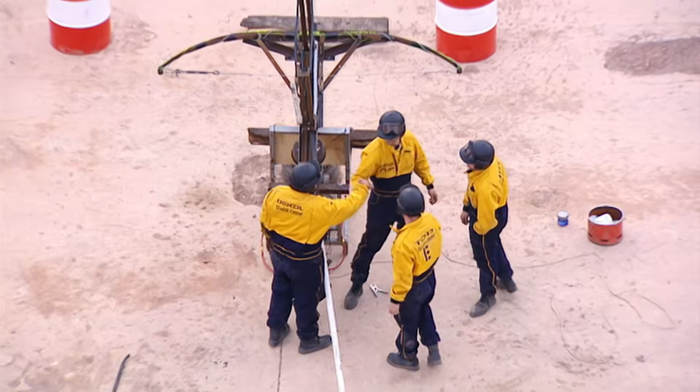Stage crew, Big Dippers, thank you both for a really, really enjoyable challenge. But, as you know, one team has to win and one team has to come second. So well done and commiserations to the valiant stage crew, I'm sorry you were second today, but you did very well. Well done, guys, brilliant. And well done to the Big Dippers, this week's winners. Well done!

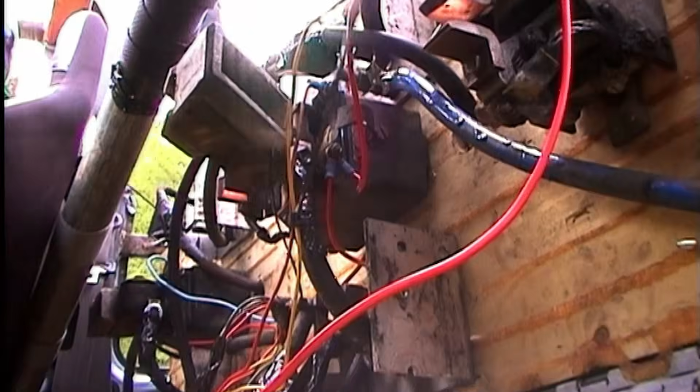And if that hit the spot, then join us next week for even more metal mayhem, as teams will have just 10 hours to fuse together an all-terrain electric car before taking on the mother of all milk rounds.